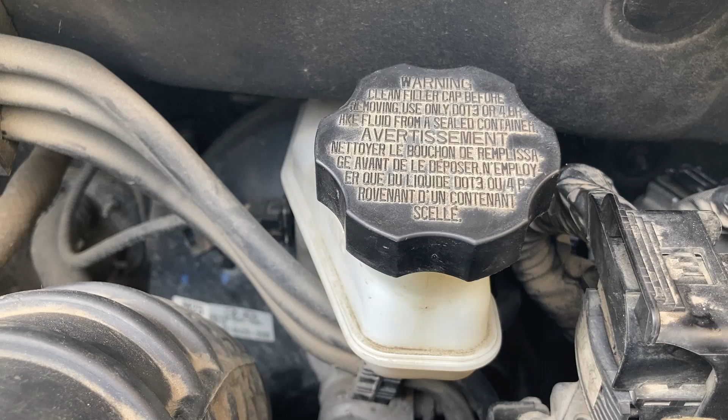Hello folks, welcome to another DIY video on the 2014 Kia Sportage with the 2-liter diesel engine. And we're here the very next day after I just replaced the 4 brake hoses on the car. And as I mentioned there, it's only natural that I also spend a bit of time right now to go with you through the procedure of replacing the brake fluid as well.

Now, in a moment, I'll give you details about the age and mileage of the car and the age of the brake fluid. But the summary is the fluid that we have in our car in this very second does not need changing at all. Which is why today's video is going to be focused primarily on the brake fluid changing procedure rather than the actual removal of the fluid. And as always, I'll do my best to give you as many details as possible, which I hope you will find useful and helpful.

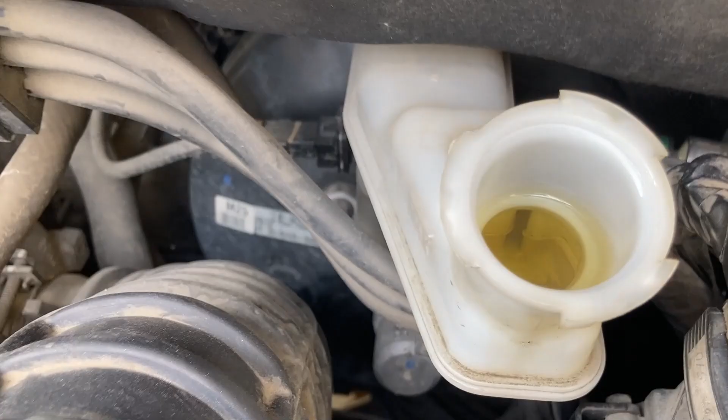Now let's head over to the car. And let's start by me actually showing you the state of the fluid. And here it is. And this is how new fluid looks, namely clean and amber. Now the reservoir is slightly overfilled. Hopefully you can see here on the side that there's a marking labeled max here and minimum down there. And obviously it's slightly overfilled because I overfilled it yesterday as I was bleeding the brake hoses. But this is not going to affect us because as we're going to bleed some more during this video, the level is inevitably going to come down.

Now, a while back, I did the brake fluid replacement video for the Range Rover. And in that film, I actually spent a good amount of time talking about different types of brake fluids and the ideal brake fluid changing interval, so I won't go over those observations in as much detail. I'll put a link to that video in the description if you're curious to learn more.

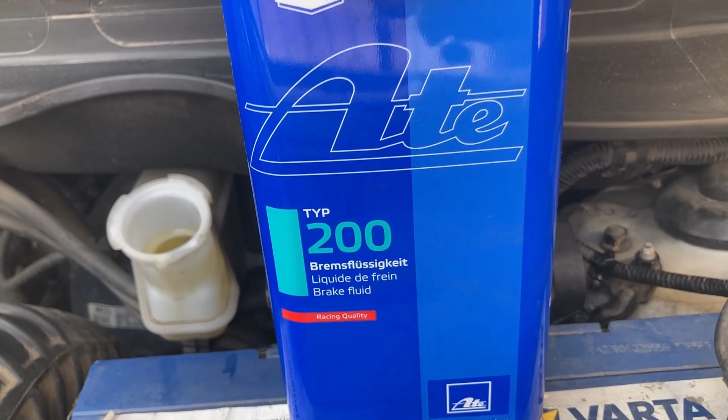But the summary is this: the recommended changing interval for the brake fluid is normally about 2 years. In my particular case, this is the fluid that I've used almost 2 years ago and yesterday and today as well. And this one, as I said, is rated for 3 years. And it is pretty good quality fluid. I've had no issues with it over time. But more importantly, I would recommend that you periodically check the state of your fluid in the reservoir. And if you see it's gotten dirty or it's starting to turn brown or worse, going towards black, then you're at a point where you should seriously consider doing this change.

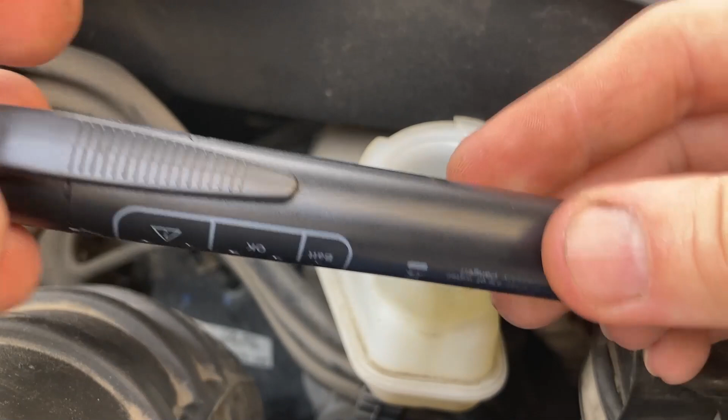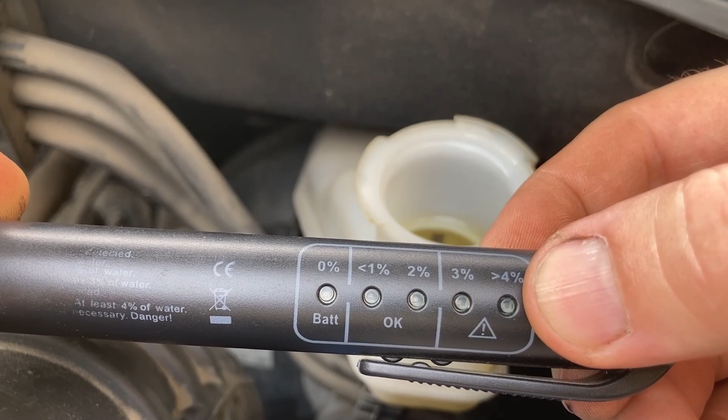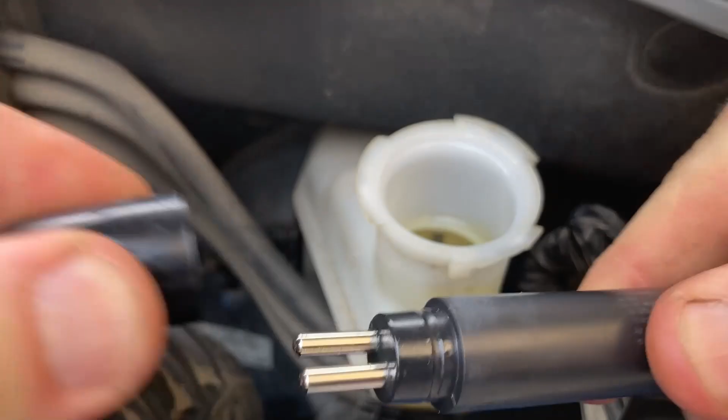And in addition, if you need a tool to tell you what the state of the fluid is, you can always get yourself one of these small pen-like devices that take one simple battery. And they have these indicators here, which tell you just how much water you have in the system. The idea being that if it's over 4%, then the fluid needs changing immediately. The way this thing works, and you can get it from AliExpress or something, it's really cheap, a couple of bucks. It has this cap with the 2 pins that you're supposed to submerge in the fluid. And then with the battery on, you press the button and it lights up one of the LEDs in accordance with the state of the fluid.

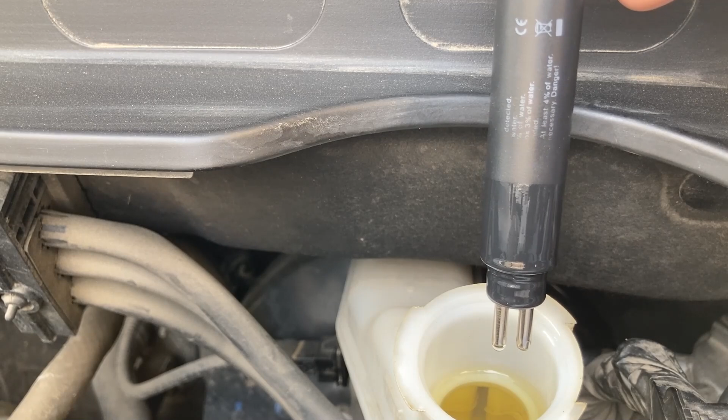And as we expect, ours being almost new has 0% water in it, which confirms what I said at the beginning, that we don't really need to change it right now. And one other observation, brake fluid is probably amongst the worst fluids in the car that you need to interact with. It's highly toxic, meaning you don't really want to spill it on the ground so as not to attract small animals, children, heaven forbid, and so on. And it's also highly corrosive on paint. If you drop any of this on paint, go on and clean it immediately. Don't let it sit. Damage occurs in less than 5 minutes. Okay, let me take this away and let me close the reservoir for now.

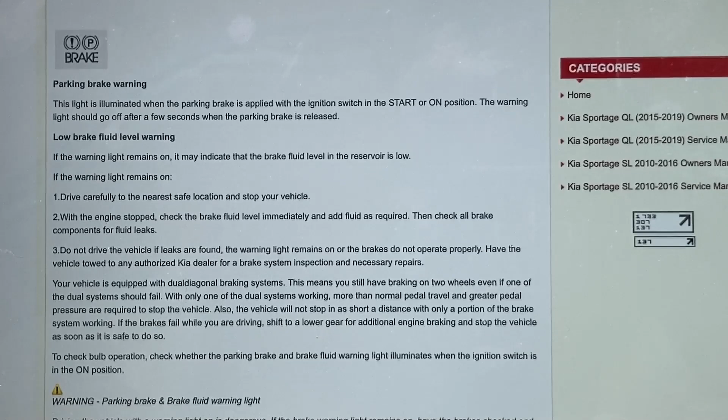And let's start by talking a bit about some technical aspects of the brake system inside the third generation Kia Sportage from 2010 to 2016. And the first important thing to mention, I'll put a link to this webpage in the description. It's actually a good and freely available, even though partial, workshop manual, which you can use and which I have been using for a while.

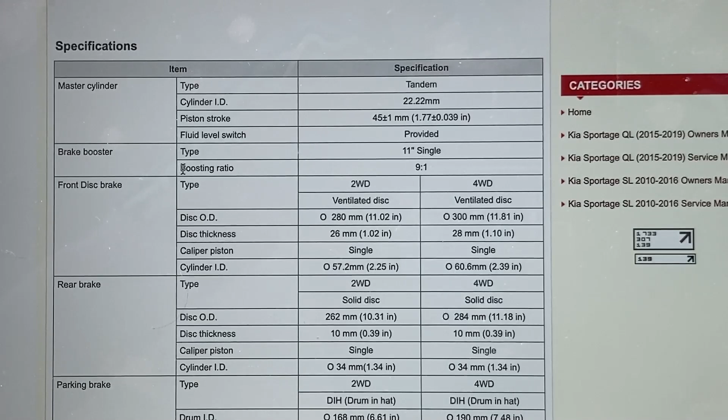And I'm gonna draw your attention to this particular chapter, which says that our Sportage is equipped with dual diagonal braking systems. Namely, each front wheel is paired with the rear wheel in its diagonal, which means, for example, that if you get a brake fluid leak at one of the wheels, you won't lose all of the pedal braking, but only about half of it. And this is also gonna be relevant in a few minutes when I discuss the brake bleeding order at the wheels. And on a different page from the same website, you also get some technical specifications, one of which is relevant, this one, the boosting ratio of the brake booster.

Now, in the brake hose changing video, you'll notice that for each of the wheels, after I bled the hose with the engine off, I always turned the engine on and applied the brake repeatedly to make sure that I don't have leaks. The main reason is this particular boosting ratio, with the rationale being that you may encounter, though hopefully you never do, situations in which a leak doesn't develop if you apply the brakes with the engine off and no boost, but it does occur once boost is active.

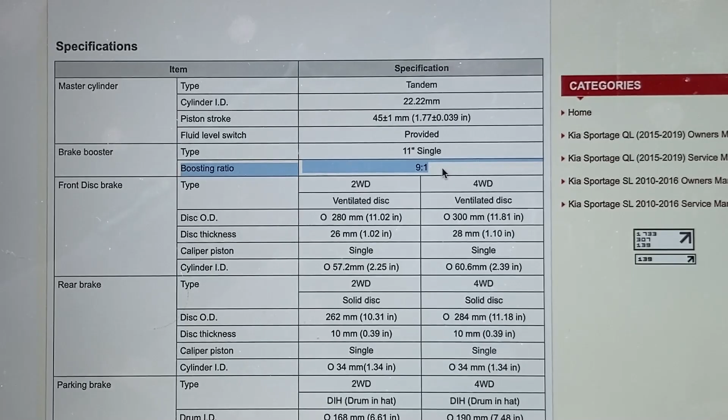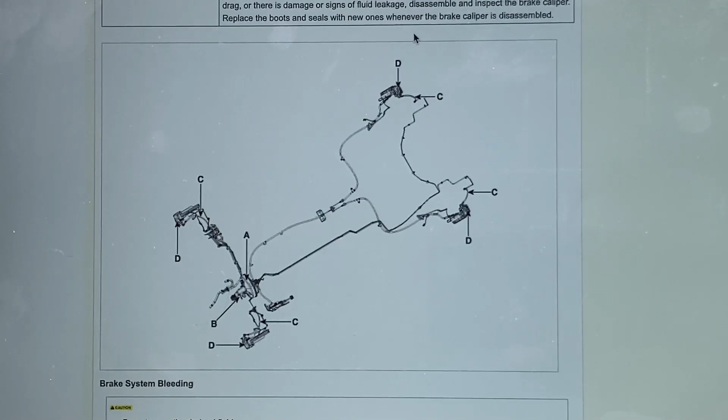Just to give you a hypothetical example, let's say you change the brake fluid and you don't torque the bleeder valve to spec, and for one reason or another you under torque it at some critical value where a leak will only occur as you're driving and as the brake pressure is normally multiplied by the booster. And lastly, here's the page about brake operation and checking for leaks, as I mentioned them before. A schematic of the brake system. Details about brake bleeding, i.e. the procedure I'll be showing you in a few minutes.

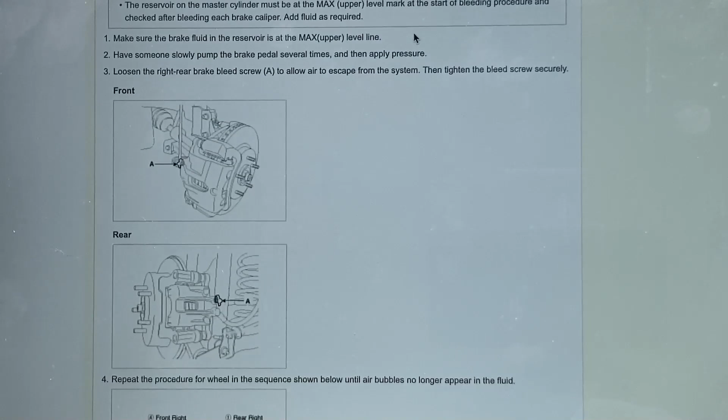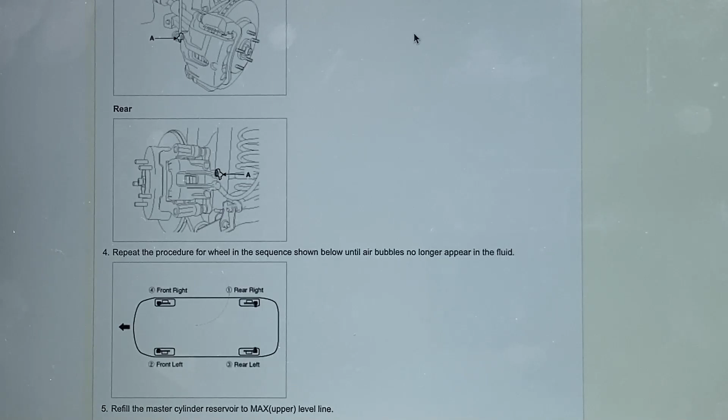And a very important detail, which you see down here, is the bleeding order at the wheels. And you'll notice that the order is rear right, front left, rear left, and front right. So diagonally. And this may be a little counterintuitive, because the general theory is that you always bleed the brakes in decreasing order of the distance from the wheel to the brake booster or ABS module. But this is actually the order that we'll be following, knowing that our Sportage has dual diagonal circuits. And with that said, let's head over to the car now.

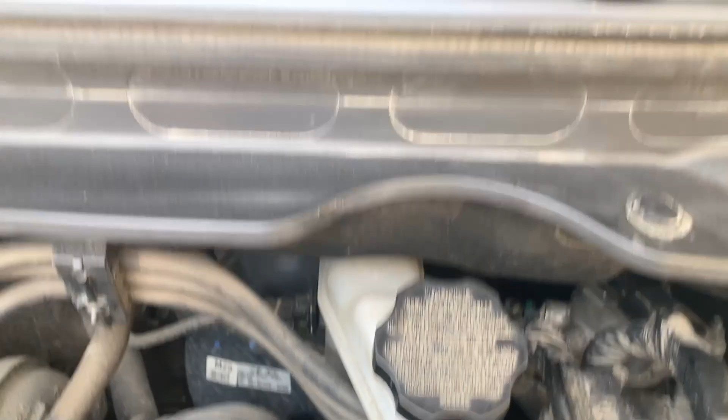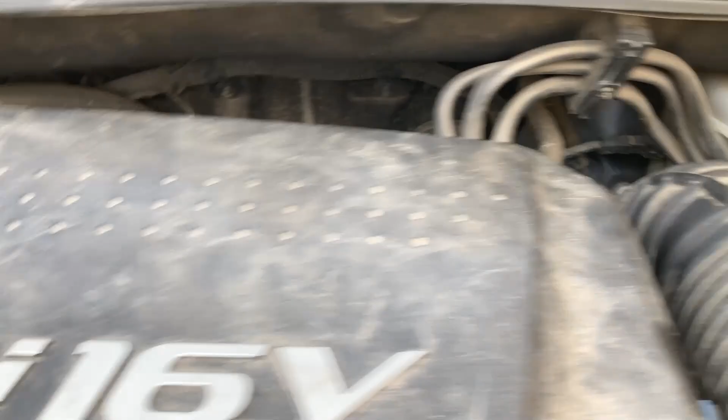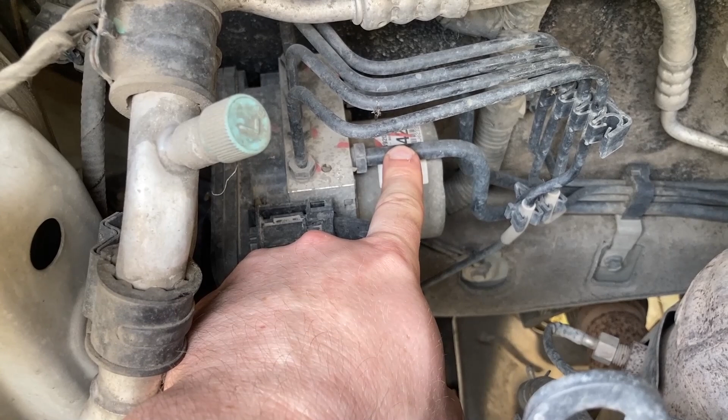And let's take a quick look at the braking components in the car. So here we have the brake fluid reservoir that we saw earlier. Behind it is the brake booster, right? The one with the 9:1 multiplication when the engine is running and supplying it with vacuum. And the reservoir is underneath the driver's side, or towards the left of the car as you're looking forward. Moving on towards the right, over here is our ABS module. And you see how the module has two thicker pipes connected to its side. These are the feeder and return lines of fluid from and to the reservoir, and four thinner pipes that emerge from it and go to each of the wheels.

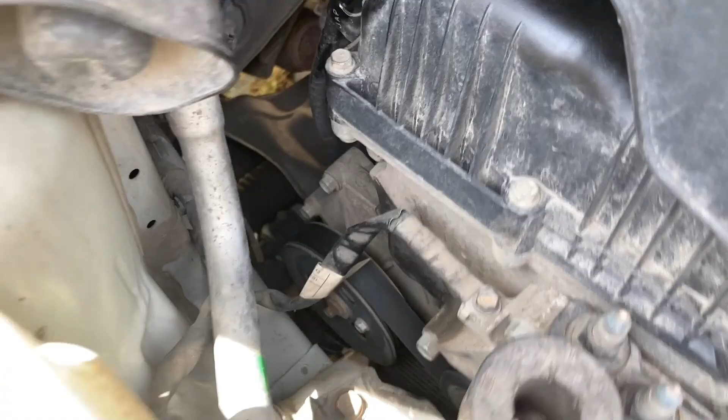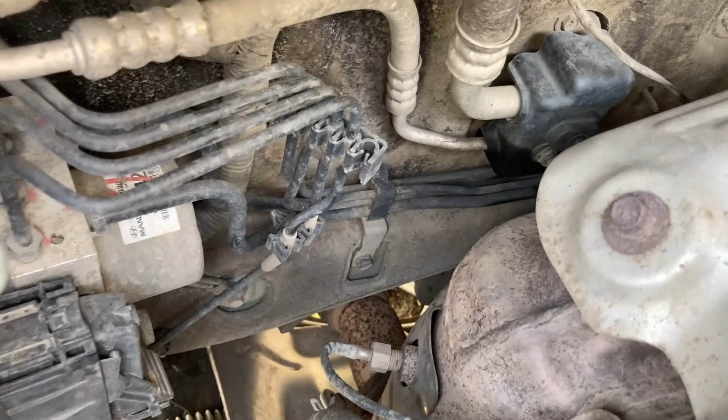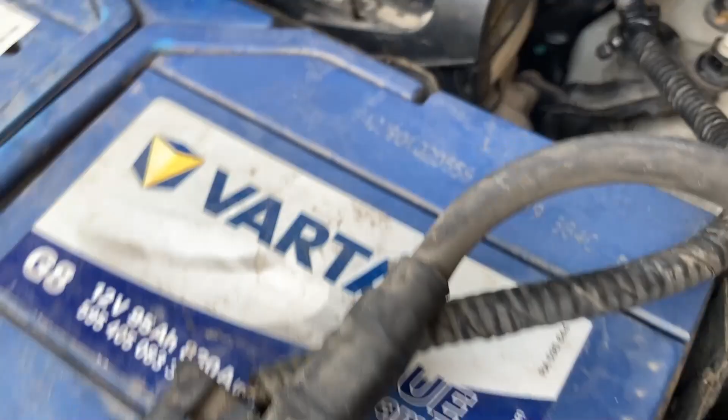Now let's take a look at these 4 pipes. The one in the front here, if you follow its course, goes down here. You see it over there, and actually emerges right here, hooking up to the brake hose that provides brake fluid pressure to the front right wheel. The remaining 3, which you hopefully see down there, move towards the left side of the car. Now one of them goes underneath the ECU and the battery to emerge at the front left wheel. I mean this one.

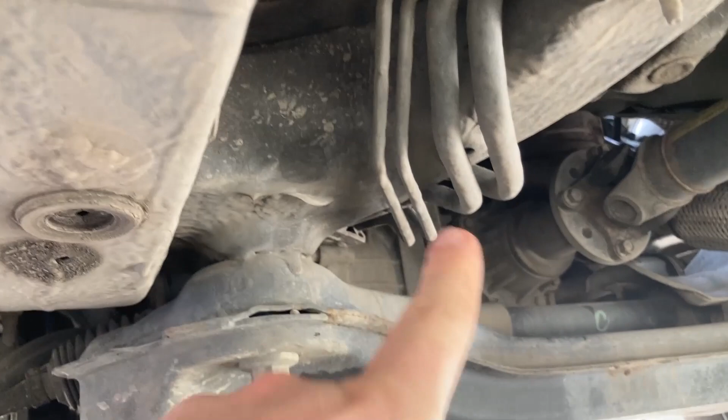As for the 2 that go towards the rear of the car, here they are. You can see them here again towards the left side of the car. And they go all the way back, hiding behind this plastic panel. And they then emerge here to the left of the diesel fluid reservoir and continue their path to this point where they separate, with this one here emerging above the anti-roll bar at the rear to feed the rear left hose. Finally, that is the one for the rear right wheel, which goes from one side of the car to the other, above the rear diff, all the way to the rear right brake hose.

Now, why did I go through these details? Well, in order for us to actually determine, as an exercise at the very least, the decreasing order of pipe length from the ABS module to each of the wheels.

And given what I've shown you, it's pretty obvious that the longest pipe goes to the rear right wheel, the second longest goes to the rear left wheel, the third longest or second shortest goes to the front left wheel, and the fourth longest or the shortest goes to the front right.

And this actually correlates well with the fluid changing order that we've seen in the technical documentation a bit earlier, in the sense that we should always start with the rear right wheel, and here we have a choice. We can continue then with the front left because they're on the same circuit, and obviously the pipe to the front left is shorter than the pipe to the rear right, and then do rear left followed by front right.

Or if you don't want that and you want to adhere strictly to the decreasing distance rule, then it's going to be rear right wheel first, rear left wheel second, front left wheel third, and front right wheel fourth, in that order. But as I said, in our case, we'll do the bleeding according to the manual in the diagonal pattern. So, without further ado, let's get to work.

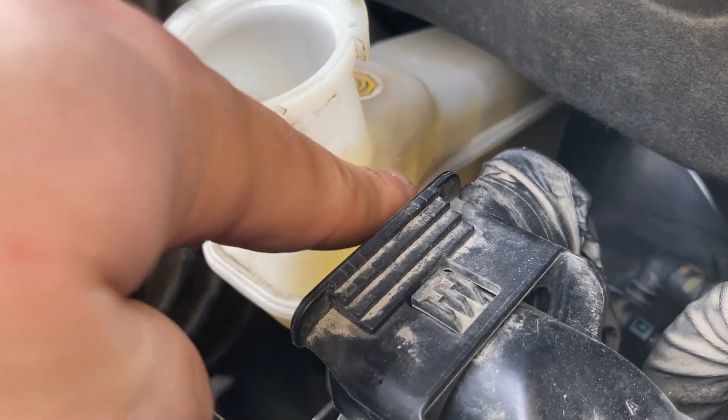And the first step when bleeding the brakes, as always, is to open the brake fluid reservoir, and before you open it, always clean its surroundings, especially underneath the cap, because you don't want dirt and dust and everything to fall in. In our case, it's clean from yesterday. You open the reservoir, and you should always top the fluid to the max line. Okay, in my case, I added a bit more because, as I said, I know we're going to be removing it, but the general rule is always to the max and not more. And now we can head over to the rear right wheel and start working.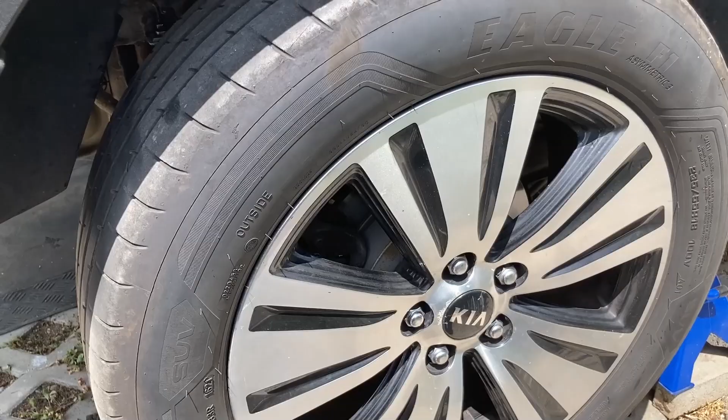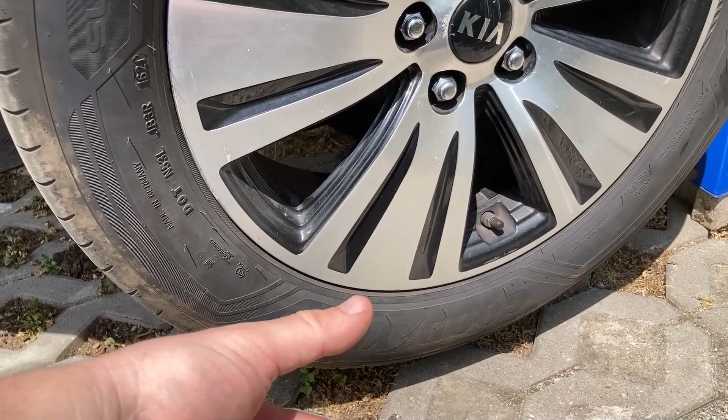So here we are at the rear right wheel, which I will be taking off simply because I want to offer you a better viewing angle for the bleeding. But it's important to note that you don't really have to take any of the wheels off when you do the brake bleeding for this car, which is, if anything, an extra safety measure. You would just need to put the car on some bricks or something just to raise its clearance by a few more centimeters. And then you can simply crawl underneath.

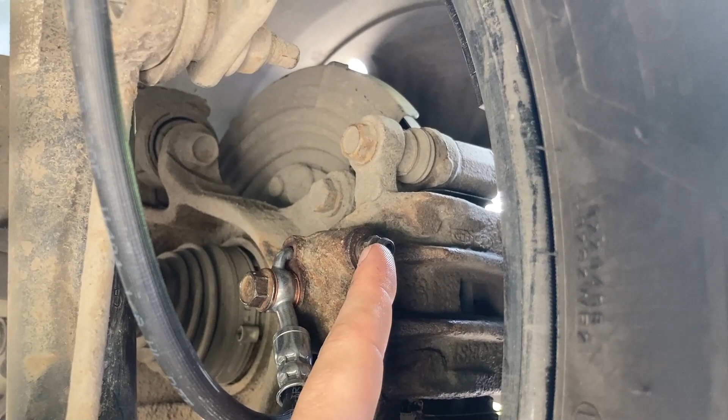And as you can see, there's a lot of space from the bleeder to the side of the wheel, more than enough to put a spanner in order to open and close the bleeder, and also to put a tube in to drain the fluid. And as a matter of fact, when I changed the fluid in August 2021, I did just that. I didn't want to take any of the wheels off, and I managed to do the procedure without too much trouble. But given that our car right now is still fully suspended from the work on the hoses yesterday, I'm gonna take advantage and, as I said, remove each wheel in turn in order for you to see the procedure a little better.

And after I've removed the wheel, I'm gonna start with the first step, which is very important, and which is to give your bleeder valve the maximum chance of opening, which is especially important if you haven't touched it in a while, because it's not really uncommon, and there are many YouTube videos out there describing what happens when you can't actually open it, either because it was too tight inside the caliper from the last time or because it rusted in place.

And the idea is that you want to open it without breaking it, because if you break it, you're pretty much stuck along with your car. You can't really drive anywhere, and you'll have to go through the hassle of removing whatever bleeder stub is left, or at the worst case, get a new caliper.

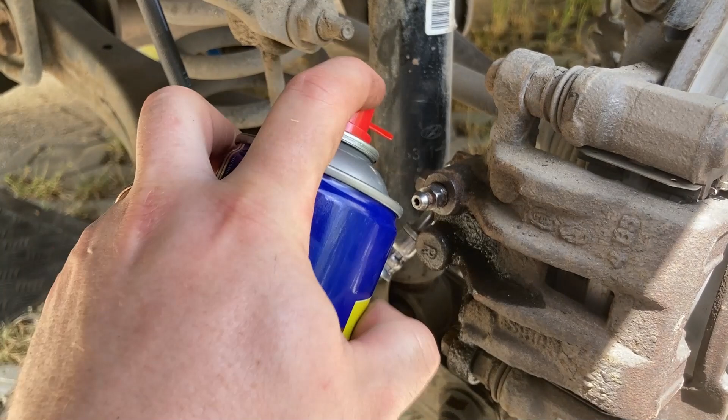And to actually give it this best chance, start by cleaning the area around it with a metal brush, just as I did yesterday when I changed the hoses. Make liberal use of brake cleaner to get dust out, and maybe even apply penetrating oil and let it soak in for a while. And after the penetrating oil has done its job, clean everything up again.

Use a closed head 10mm spanner like the one I have here and put it over the valve's nut, and then bring a thin tube that will route fluid from the valve to a container. This is my container from yesterday. There's still a bit of dirt in it from when I cleaned the calipers and such. Just go ahead and ignore that. I just haven't had time to clean it, so we'll leave it as is.

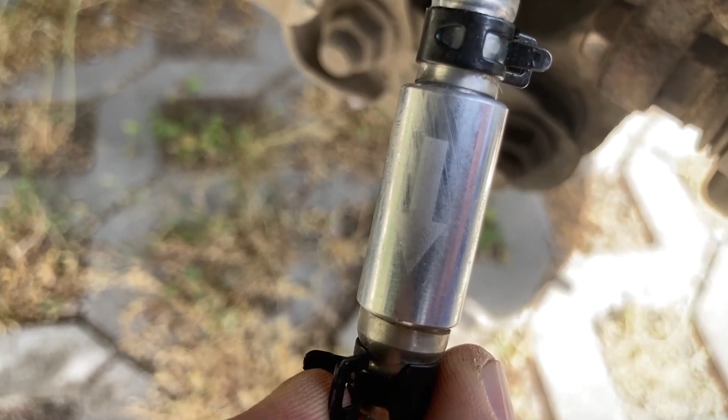And I'll be using a one-way valve. See the arrow pointing downwards, which is a very neat device that helps you a lot, because what it does, it allows fluid and air to go one way but prevents air from going backwards.

And this thing would allow you to bleed the brakes yourself without needing a second person or helper. However, I'm gonna be using a helper anyways, just so I can film stuff and comment on it. Having said that, my setup is ready. Tube connected to the valve and the output of the valve to the container.

And before I start, let me just go through the steps that you would need to follow if you don't use one of these valves and just have a tube routed directly to a container. What you would want to do is you would want that tube to go in the container that already has some clean brake fluid in, such that the end of the tube is not exposed to air but only to clean fluid. The idea being that as fluid is coming out, as your helper will be pressing the pedal, whatever air is being pushed out is going to go into the fluid and bubble out, and as your helper is releasing the pedal, it won't draw in air, but instead it'll draw in fresh fluid.

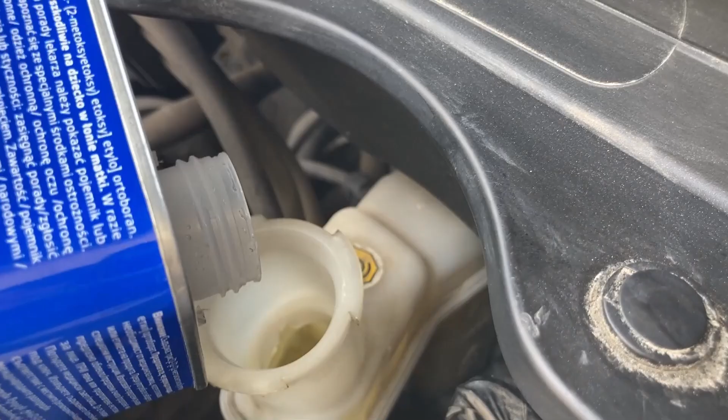Here is the fluid that came out, which is very clean, as expected, given that it's very fresh. And normally after 7 to 10 presses, we go to the fluid reservoir, check the level and top up as necessary. Case in point, here's the level, and as you can see it dipped below max, whereas before it was somewhere around here. Now we top up to max. Okay, it's at max level now.

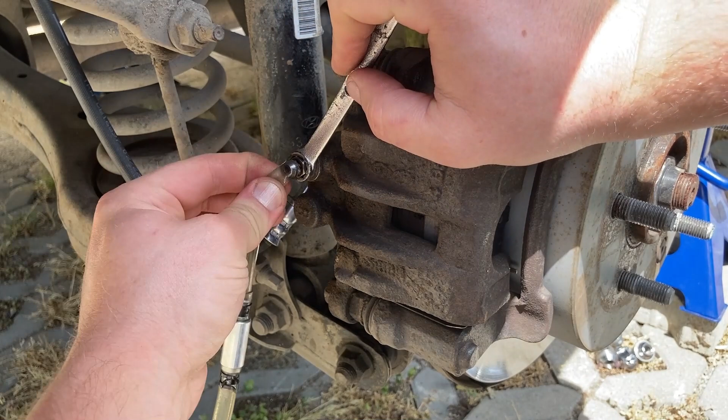And now normally you would repeat the procedure, open the valve, bleed after 7 to 10, close it, refill the reservoir and so on, until, as I said, fluid that comes out is clean. But in my case, because it's already clean, we're gonna stop here with this wheel. So with the valve closed, we remove the bleeder tube, remove the spanner, and the valve should be torqued to 10 or 11 Newton meters. Like so. And this wheel is done.

Then for good measure inside the car, after the valve is closed, press on the brake pedal. You should definitely feel it firm up and offer resistance. And after pressing on the pedal, do a visual checkup to make sure that the valve does not leak. So in our case, I put the wheel back on. Everything is good on this side. Let's move on to the front left.

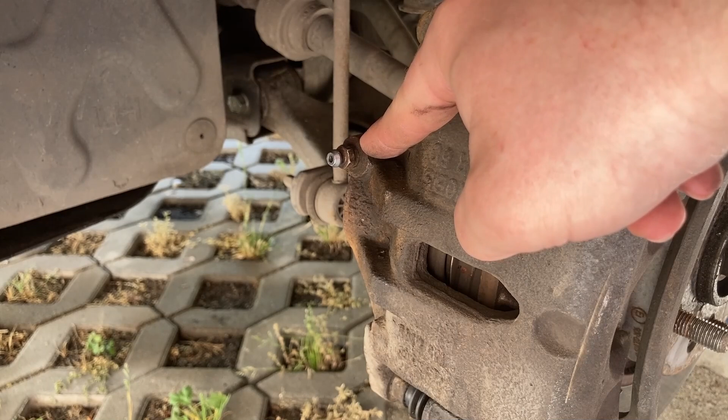Here we are at the front left wheel. The wheel has been already removed. There is our bleeder valve. We remove the cap. Normally, just as before, you should clean it up, apply penetrating oil, let it soak in to ease its opening. In my case, I won't do that again because I know it's gonna open because I just opened it yesterday. Okay, and here's the setup as before. Again, I haven't cleaned the container, nor will I. I'll just collect all the fluid and take a look at it later.

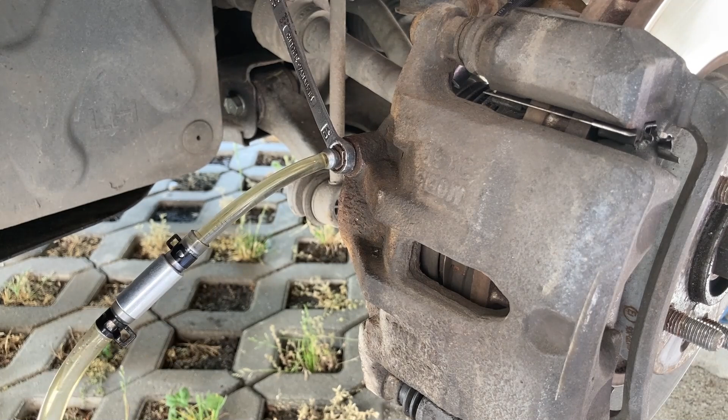Okay, my lady's at the wheel. Let's crack the bleeder valve. 45 degrees. And 7 brake pedals, please. Thank you. Closing the valve. Okay, you can release the pedal. Thank you. At the last press she was holding on to it in order for me to close the valve, and after I did, I asked her to release it.

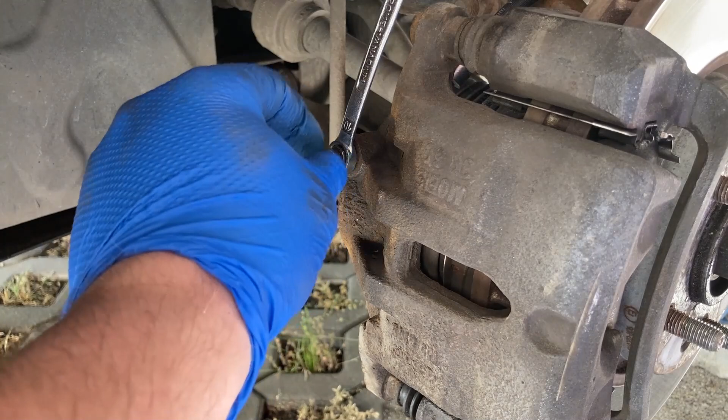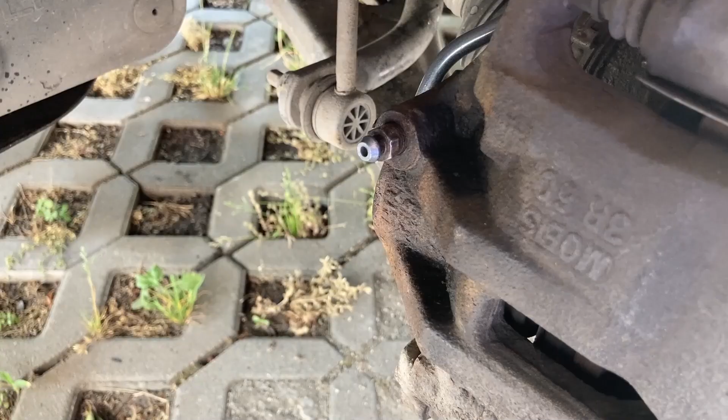And just as before, I'm gonna take the tube out, though you should continue until fresh fluid comes out. And the spanner. And let's torque the valve, again 10 to 11 Newton meters. Done. And after torquing the valve, don't forget to press the brake pedal a few times to make sure there are no leaks. Could you press it one more time, please? Is it solid? Yes, yes. Perfect. So it's solid, and as you can see, no leaks. And don't forget to put the dust cover cap back when you're done. And top up after the 7 brake pedal presses, again to the max.

Okay, done. The next one is going to be the rear left wheel. So here's the rear left wheel. With the setup done, again, in your case, spend time cleaning and helping the valve to slacken before. So, slacken the valve, 45 degrees, and 7 brake pedal presses, please.

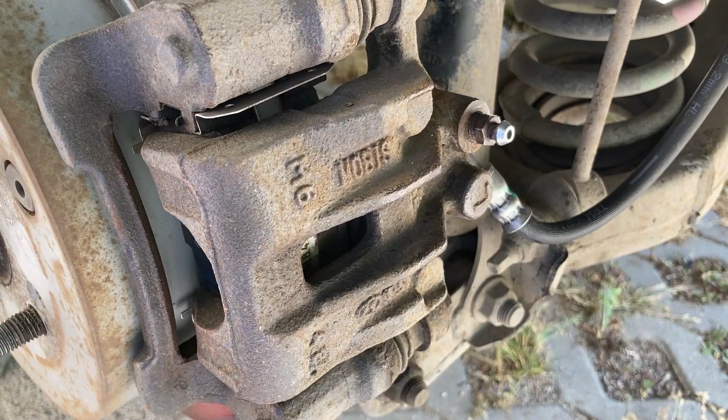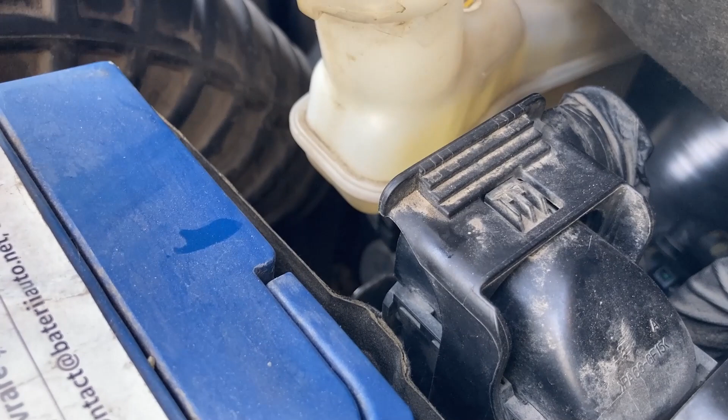Okay, 7, closing, removing the tube. You can release, thank you. And the spanner, cleaning up. Torque the valve. Good. And remember to put the dust cap back, though I seem to have misplaced mine, so I'll have to go and look for it. And top up with brake fluid. Seems I overdid it a bit, but that's fine, we still have one more wheel to go.

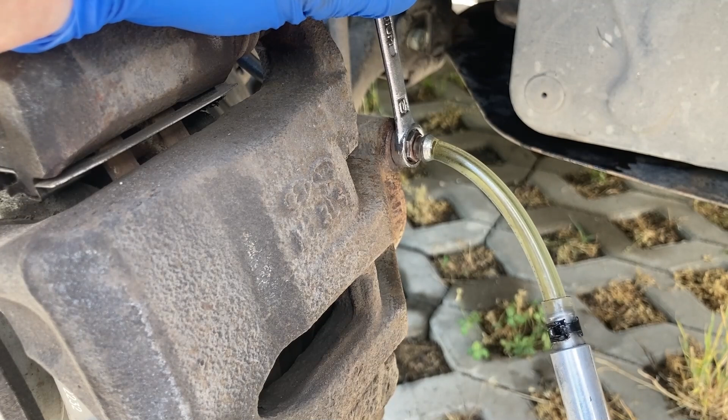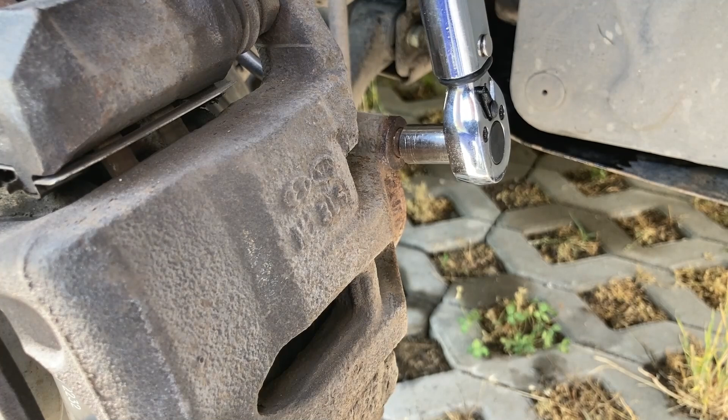And here's everything set for the front right wheel, the last one. So, we crack the bleeder open, 45 degrees, 7 presses please. Okay, close it, release, thank you, and one more time, tube out, spanner out, torquing, cleaning, wiping,

and leak testing. Press the brake please. Is it solid? Perfect. And we have no leaks, which is good news. So our 4 wheels are properly bled. Let's put the last tire on, and then we have one more test to go before we can head out. And with the last wheel installed, we're now at the point where we do the last top up of the fluid reservoir, and the recommendation is to top it up to max.

But I actually want to take the opportunity for a quick comment right here, and to raise the question, should you do the last brake fluid top up to the max? Well, the answer is yes in most cases, but you have to think what happens if, for example, in the near future, you're going to replace some of the braking components like pads or discs. Because when you do that, you usually need to push the caliper piston or caliper pistons all the way back to make room for the new discs and or pads.

And when you push the piston back, all the fluid that's inside the caliper needs to go somewhere. Now what you can do at that point, you can open the bleeder valve, at which point the fluid will come out of the valve and you will be fine. But if you don't do that, the only way for the fluid to go is back through the system and up inside the reservoir. Meaning that if you fill it up now to the max and in a week or a month from now you're changing components, as you're pushing the pistons in, the fluid level will go past the maximum and you risk having issues such as fluid spills or overpressure or whatever else.

And for the last test, after all wheels are installed, again, because we have sufficient room underneath the car, we're gonna start the engine and go to each caliper, apply the brakes, and again check for leaks. The argument being that with the engine on, you also have the booster supplying additional pressure. So if there's any leaks, you're bound to see them once the booster is active. Or equivalently, if there are no leaks, then it's a safe bet that everything is in order. So let's start the car.

Okay, apply the brakes. Okay, release. Apply the brake. Release. Apply. Release. Okay. So rear left is good. Let's go to rear right. Apply. Release. Apply. Release. All good here as well, no leaks.

Front left. Apply. Release. Apply. Release. Apply. Release. All good here as well. And last one, front right. Apply. Release. Apply. Release. One more time. Apply. And release. And we're good. So we don't have any leaks anywhere, and we can go out for a test drive. Okay, you can shut the engine off.

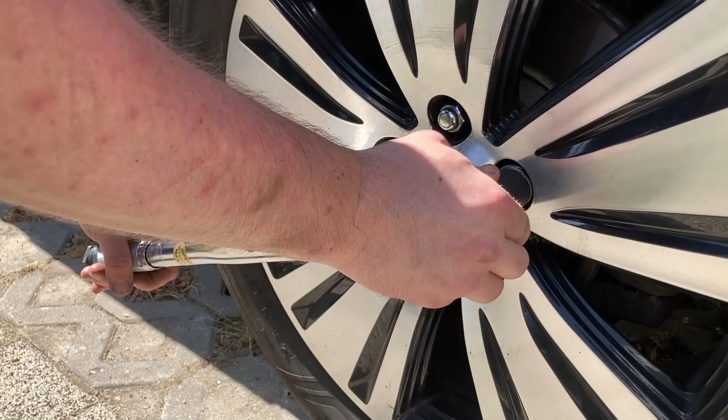Thank you. And now with all wheels on the ground, we need to also torque them down before heading out. 105 to 110 Newton meters each in a star pattern. All right, and the same for the others as well. And here we are in our test drive. Just some casual driving with multiple cycles of accelerating and braking to make sure there are no issues.

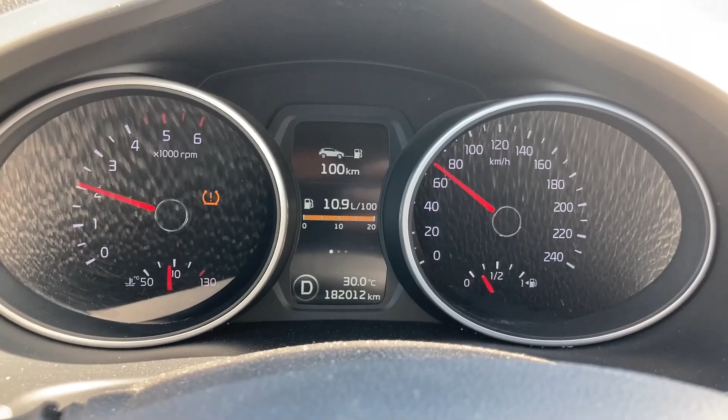And for good measure, a brake, a hard brake from higher speed. And yes, everything feels normal, just as it did before. So I'm very happy with the results.

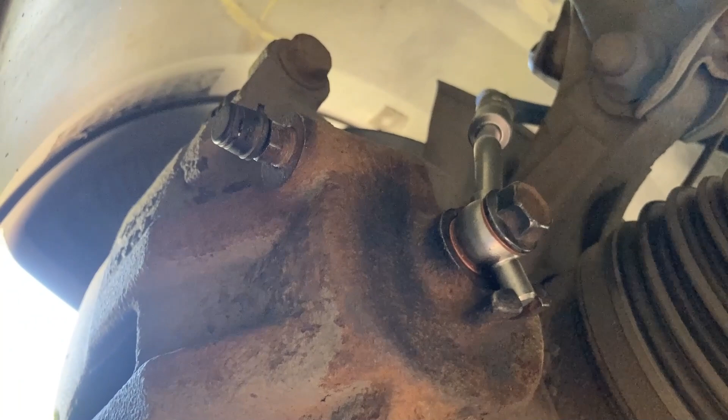And back from the test drive, underneath the car, let's take a look. We have no leaks here, nor at the bleeder valve, which is good. And there are no leaks at the connections between the hose and the pipes, which is again okay. And we see there are no leaks at the bleeder, which is very good. This is the left side.

And at the back, this is the left part. Up here all is well. Down here all is well. And the bleeder's fine as well. And on the right side, similarly, no problem here, no problem here, and no problem up here.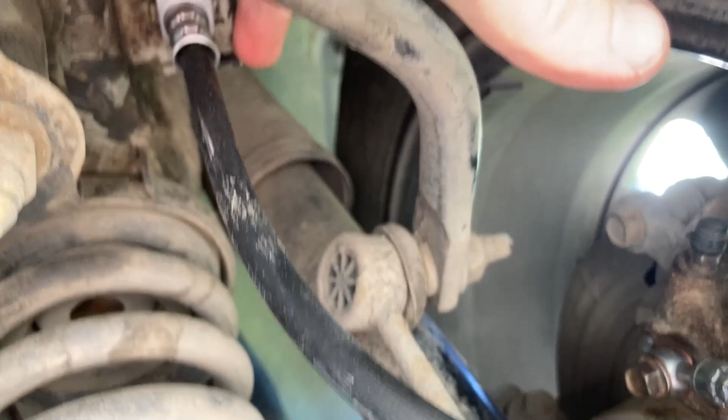Perfect. And after shutting the engine off, let's take a look at the fluid level as well. It was at max before the test drive, and it's still at max now, maybe even higher because there's some heat in it as well. Combined with the fact that we've seen no leaks at any of the bleeders, this leads us to conclude that the fluid replacement has been successful and everything is in order, which is very good, and it means we can move on to the conclusions now.

Alright folks, after a few 100 kilometers of problem-free driving, I checked all 4 wheels. I've got no leaks. The fluid level in the brake fluid reservoir is where it should be, at the max line, so all is well from the procedure's perspective. And I just want to touch on a few important details.

First, and the most critical, do keep in mind that brake fluid is extremely toxic and corrosive to paint. If you get it on any of the car's painted surfaces, clean it up immediately, because even a few minutes can damage the paint. But more importantly, always collect spilled brake fluid in a container and keep that one safe and sealed, because if animals or children get access to it and drink from it, heaven forbid, there is a real risk of death. So pay particular attention.